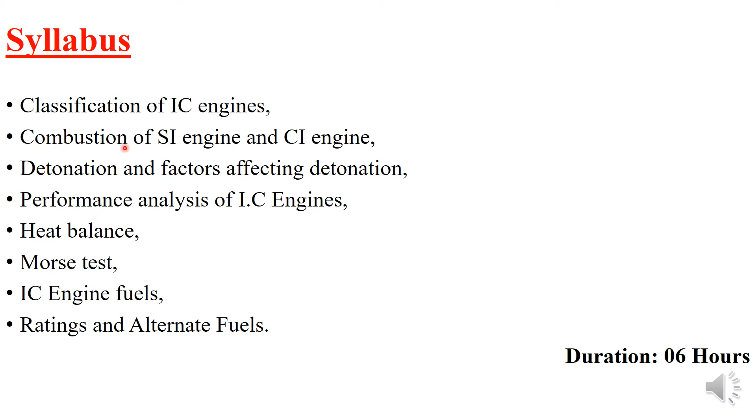So we will come to combustion of SI engine. Before going to combustion of SI engine, we should take care of what you mean by SI engine. As you already know how SI engine works, first the charge - that means fuel plus air - during the suction stroke goes inside the cylinder.

After the suction stroke, the charge - fuel plus air together - is compressed. So pressure will rise, temperature will rise. When the piston reaches top dead center, spark will be produced, and due to that spark, combustion of the fuel takes place and power is produced, which is transferred to the piston. So we have the expansion or power stroke, then the exhaust stroke.

Today we are concentrating only on the combustion part. Remember, only that combustion part - at the end of compression, whatever combustion takes place. So how is it going to happen?

In an SI engine, this is very important because due to combustion itself the power has to be produced. That means whatever energy the fuel is having, all of it has to be converted into heat energy. We are trying to improve that combustion efficiency, so you should know how that process takes place so that maximum power can be utilized.

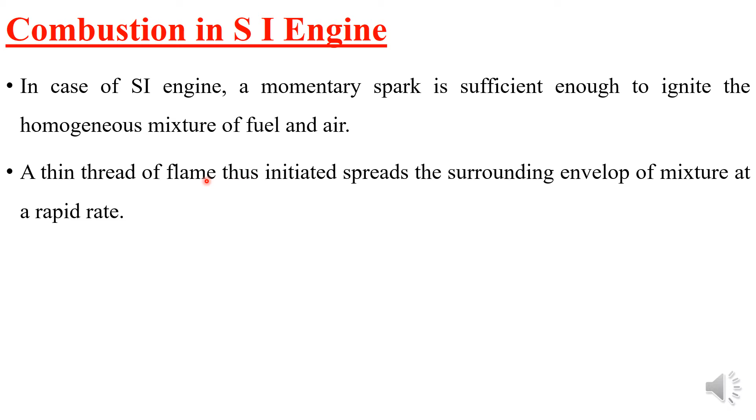As the momentary spark is ignited for the homogeneous cylinder mixture, a thin thread of flame will be produced - that means one flame nucleus will be produced. From that flame nucleus, we produce the flame front, and that flame front has to rapidly cover the entire combustion chamber so that all the fuel is burned and power is produced.

So now we come to know that combustion depends upon the propagation of the flame front. That means once the flame nucleus or flame thread is formed, the flame front is covered, and that flame front should rapidly propagate to the entire combustion chamber.

So what do you mean by flame front? Before going further, you should know what flame front means. Flame front is the boundary or the front surface - carefully listen - it is the boundary or flame front surface that separates burned gas from unburned gas.

So we have one closed chamber. In an IC engine, the combustion chamber is the closed chamber. Once the spark is ignited, flame nucleus is formed. From the flame nucleus, flame front is formed - that is the separation between burned gas and unburned gas, one boundary is formed, known as the flame front.

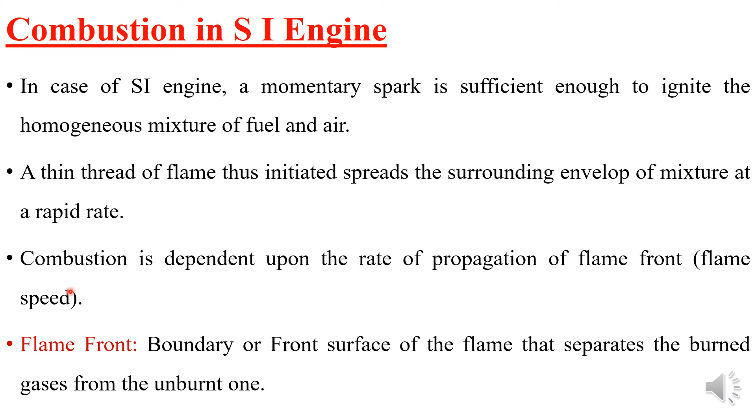So that flame front - how much speed, or how much it propagates to the entire combustion chamber, how fast it propagates - that is very important. So now you came to understand what I mean by flame front.

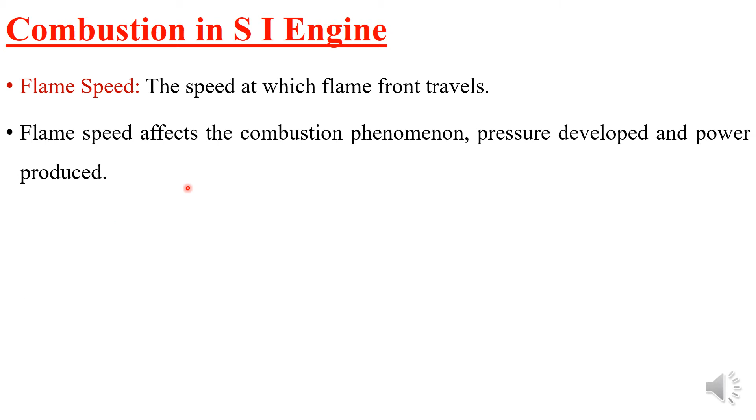We should know about flame speed. So what do you mean by flame speed? The speed at which this flame front travels through the entire combustion chamber - it has to travel the entire distance in the combustion chamber, how fast it travels, that is nothing but flame speed. This flame speed will affect combustion phenomena, power developed, and pressure developed inside the combustion chamber. So the burning rate of the fuel - whatever fuel will burn - depends upon flame speed and the shape of the combustion chamber.

Two important factors that this burning rate will depend upon: the flame speed, how fast the flame will travel, and the shape of the combustion chamber. So depending upon these two, burning rate will depend.

The factors affecting flame speed are turbulence, engine speed, compression ratio, initial temperature and pressure, and fuel-air ratio. Turbulence means how much turbulence we create between the fuel and air, so that it properly mixes and combustion takes place properly, and flame speed should travel faster. If more turbulence is there, flame speed will be more faster, it will travel.

Then the engine speed: if the speed is high, the turbulence will be high, hence flame speed will be high. Compression ratio: once again, if higher compression ratio means we create more turbulence, hence flame speed will be high for the higher compression ratio.

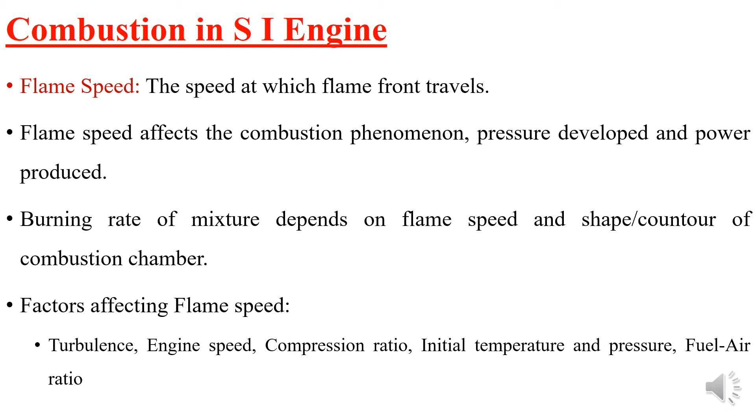So now you came to know about flame front and flame speed. Next, in the normal way, how combustion takes place after the compression: A to B represents compression, B to C is your combustion, C to D represents expansion.

A to B represents compression, B to C is the combustion, C to D is the expansion. That is the theoretical way.

But in the actual case, combustion won't take place at constant volume. It has to take some time before TDC and after TDC, so your pressure curve will be different. So we have certain stages of combustion. In 3 stages, combustion of an SI engine will take place.

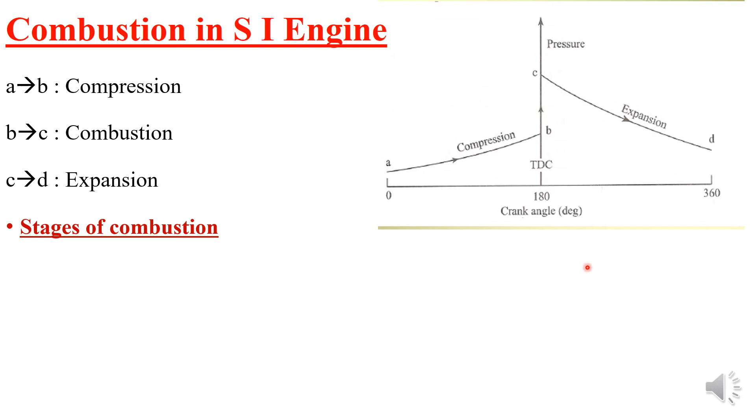The first stage is called ignition lag or initiation of flame. The second stage is called flame propagation. The third stage is the afterburning stage. Afterburning will be there for every case, because once combustion is over, unburned fuel will be remaining, which has to be burned in the expansion stroke itself. So afterburning occurs in the expansion stroke. But the 2 major stages in an SI engine are ignition lag or initiation of flame, and flame propagation.

Now we will go through these 2 stages, how it will be. Before that, let's see how the P-theta diagram will actually look, compared to the theoretical one.

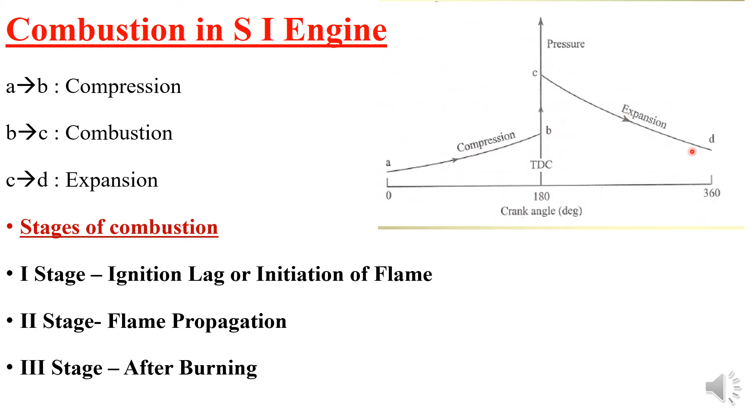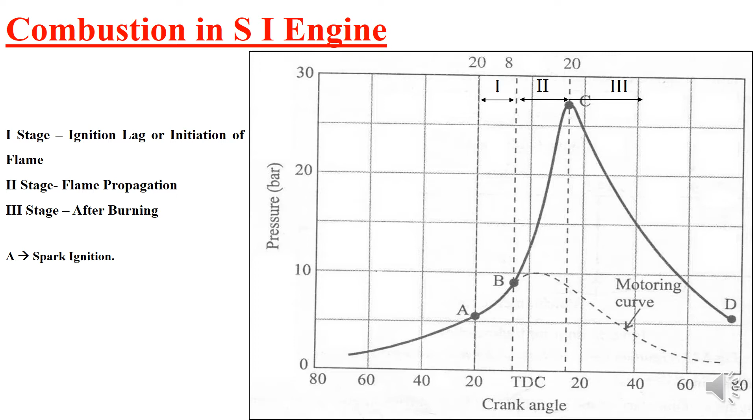Next, once you know about the normal way of combustion of SI engine, we should know the abnormal way - abnormal combustion, how it takes place. Abnormal combustion means spontaneous combustion of the fuel without initiation of spark, or without any means of initiation of combustion. So the fuel will ignite itself.

So that kind of combustion is known as abnormal combustion. This type of self-ignition of fuel without a flame, or without any means of initiation of flame, is known as auto-ignition or self-ignition. The temperature at which this self-ignition or auto-ignition takes place is known as self-ignition temperature - meaning without initiation of combustion, the fuel will burn on its own.

Every fuel has its own self-ignition temperature. When that fuel reaches that temperature, it will ignite by itself. It should have several conditions, because it should be within the ignition limit. Whenever the fuel is within the ignition limit and reaches that temperature, it will ignite by itself - that is known as auto-ignition or self-ignition, and that temperature is known as self-ignition temperature.

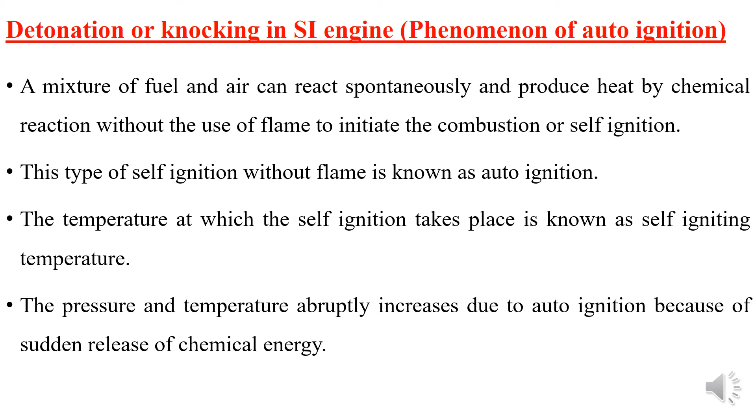Whenever that happens, pressure and temperature abruptly increase in an abnormal way, because there is a sudden release of heat energy or chemical energy of the fuel. Hence it is very important to know about abnormal combustion, because whenever it occurs inside the combustion chamber, it will affect components of the IC engine - especially piston, cylinder liner, compression rings, and cylinder head - reducing the life of the engine. So we have to avoid that. What are the conditions, and first we should know how it happens.

Before that, we will go through thermal efficiency - how much power is produced or how much heat is supplied, and from that how much work has been converted in the SI engine. This depends mainly upon compression ratio: a higher compression ratio means a more efficient engine. That's why a diesel engine, having a higher compression ratio, is more efficient, but a petrol engine has lower efficiency. Why do we keep the petrol engine at a lower compression ratio? Because of knocking or abnormal combustion in the SI engine.

Because of that reason, we are restricting the compression ratio up to a certain limit. We know that increasing the compression ratio will increase the thermal efficiency, but because of abnormal combustion, we are limiting that compression ratio to a particular value. Similarly for diesel engines also, we have a certain range of compression ratio, and for SI engines also.

So the maximum pressure of the cycle will increase, meaning pressure will increase with increase in the compression ratio. If you increase the compression ratio, the design concept changes, the weight of the engine will increase, and the cost of the engine will increase. So many problems will come into picture.

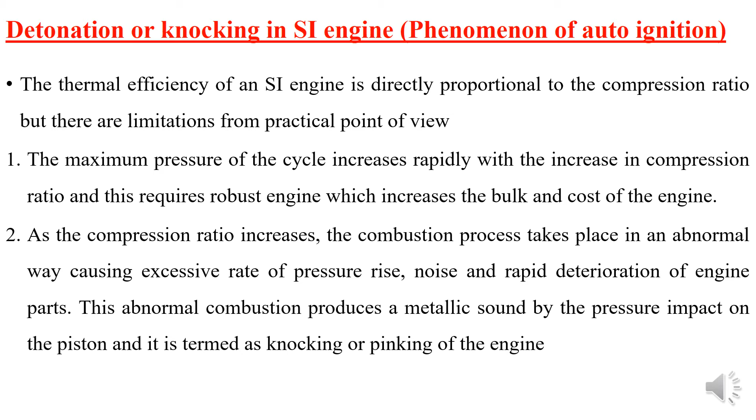So knocking, before going to our process, what do you mean by knocking? It means auto ignition of the fuel at the farthest end in the combustion chamber.

That means one spark plug is located in one position. Once the spark plug is located, flame will be produced near the spark plug because the spark is producing the ignition. So the flame front will be produced near the spark plug, and that flame front has to travel to the farthest end in the combustion chamber. So when it travels to the farthest end, the unburned gas over there may reach auto ignition due to compression ratio or some other reason, or due to earlier combustion products that might be there.

Due to several reasons, it may produce combustion in the farthest region, so auto ignition will take place there. This flame wave collides with the other flame wave due to high pressure, and it will affect the piston or any other component in the engine. So this rapid release of energy due to auto ignition produces high compression pressure waves.

These high pressure compression waves cause vibration in the engine or some kind of abrupt noise, and that is known as knocking or detonation. That means the motion of high pressure compression waves inside the cylinder causes vibration of the engine parts and a pinking noise, and it is known as knocking or detonation.

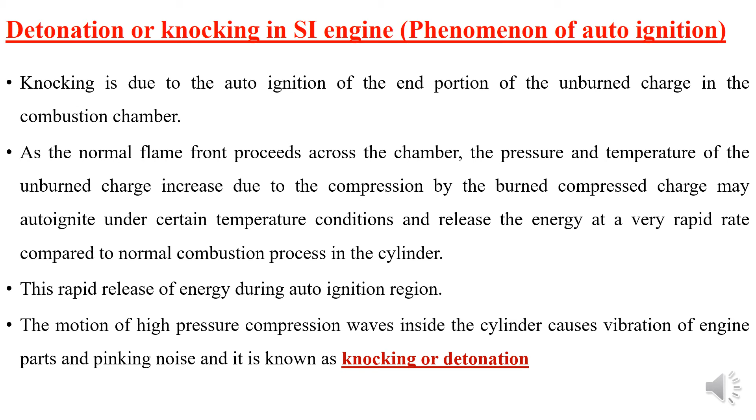Now let's see the diagram for normal combustion. Say A is the spark plug, and B to C is the flame front, showing normal burning of the charge, which is the fuel and air mixture. D is the farthest point, or the maximum distance from the spark plug.

So in the normal way, once the spark plug initiates the flame front, this flame front travels towards the farthest end. So this B to C will start from here, propagate, and reach D. This is how normal combustion takes place without detonation, and we get a smooth pressure curve, meaning we won't get any kind of auto ignition here.

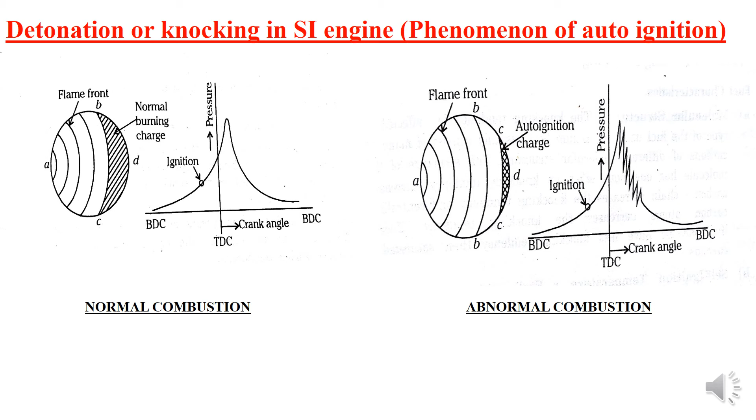Of two waves, forming the abrupt change in pressure rise. So we won't get smooth curves, we'll get curves like this over here. So this is known as detonation or knocking in SI engine. This is how detonation takes place in SI engine.

So what are the effects? As already I told, it will cause heavy vibration and creates undesirable noise. Auto ignition may, what will happen? It may overheat the spark plugs. Once the spark plug is overheated, it will be in the hot temperature region.

So in the next cycle, during the compression stroke itself, pre-ignition of the charge will take place, hence power will be lost. So during the compression stroke itself, combustion of the fuel will take place, hence power will be lost.

And more heat means we have to take that heat away by the cooling water. Effectiveness of the cooling water will be more, heat dissipation rate should be rapid. The engine parts are subjected to high pressure waves, which will cause damage to the component parts.

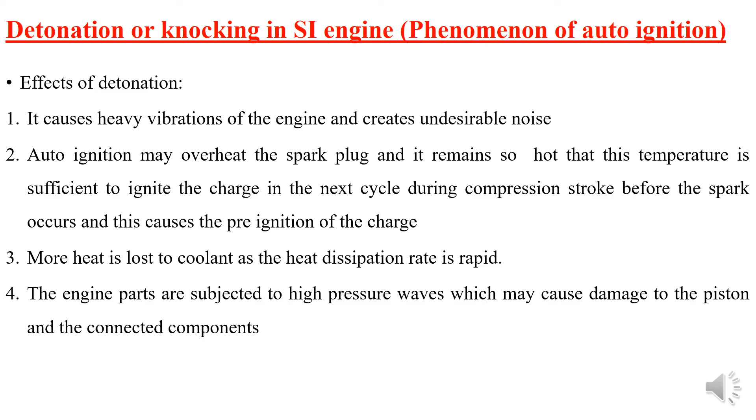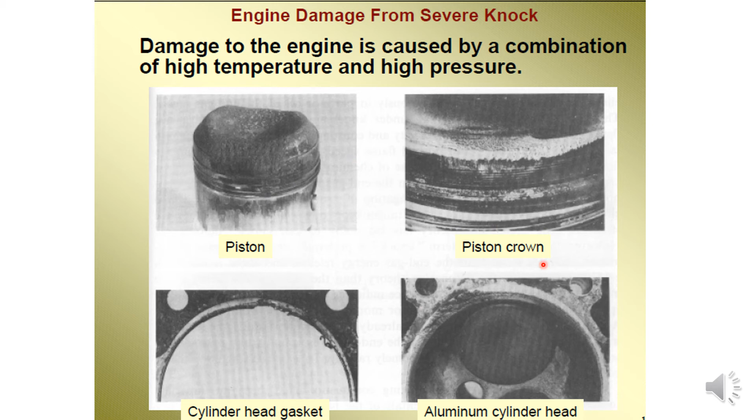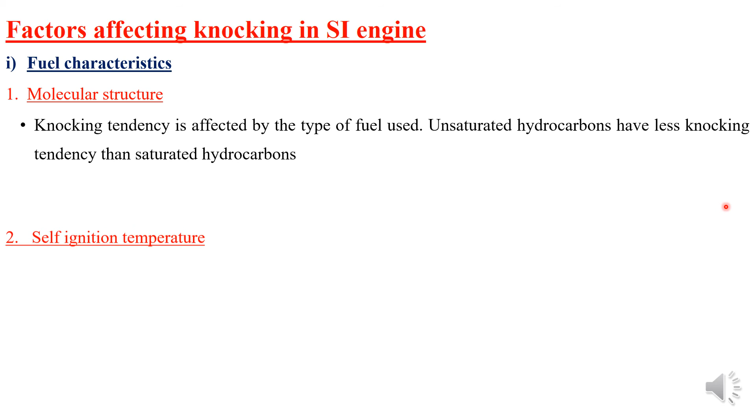Next, factors affecting the SI engine. Several factors are there, I will go through very quickly about this one. So the first one is the fuel characteristics. In these fuel characteristics, we have molecular structure, self-ignition temperature, and flame velocity.

Molecular structure means unsaturated hydrocarbons will have greater resistance to knocking than saturated hydrocarbons. Self-ignition temperature, as already I explained, the fuel should have a high self-ignition temperature to avoid knocking. If it has a lower self-ignition temperature, it will ignite before the end of compression itself. So the fuel should have a high self-ignition temperature when selecting the fuel.

Flame velocity should be more, meaning it has to be very fast, it has to travel through the entire combustion region, the entire combustion chamber, very fast. So flame speed or flame velocity should be more for that particular fuel, and this flame velocity is once again dependent on several factors which I explained in the second slide. So you go through that one once again.

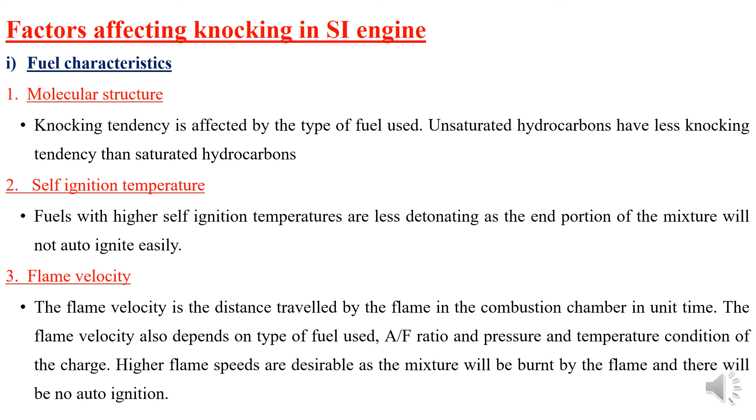Next we have the condition of the charge. One is the air fuel ratio. As already told, whenever flame velocity is near to stoichiometry or slightly richer side, we will have higher flame velocity, and better anti-knocking quality will be obtained whenever the air fuel ratio is on the richer side compared to the leaner side.

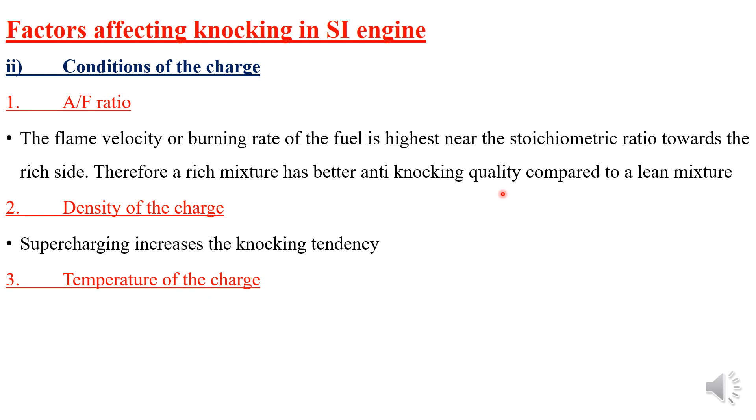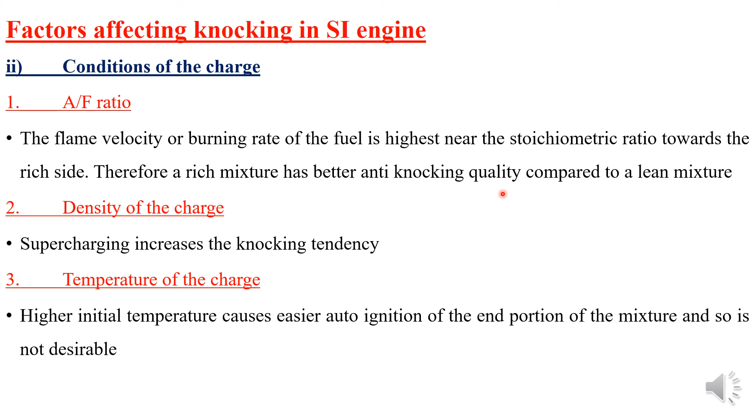Density of charge: if you are applying a supercharger or turbocharger, density will increase, which means knocking tendency may increase. And temperature of the charge: a higher initial temperature means it is easier to reach the self-ignition temperature very fast, hence knocking will be very high whenever the temperature of the charge is higher.

Next, compression ratio. As already told, higher the compression ratio, the higher the knocking tendency. Hence, compression ratio should be as low as possible so as to avoid knocking.

Under compression ratio, two types are there: dilution of residual gases and valve timing. Dilution of residual gases reduces the knocking tendency, and this way we can reduce the knocking. So valve timing is a very important aspect.

Spark timing means a particular timing where the spark is produced before TDC. For a particular engine, it is designed for a particular timing, say 12 degrees before TDC. So at 12 degrees before TDC itself, your spark will be ignited. If you want to increase from 12 to 14, that is called advancing the timing.

Or if you want to decrease, that means from 12 to 10, then it is called retardation of the spark timing. You are delaying the spark timing from 12 to 10, or 12 to 14 means you are advancing the timing, because you are in the compression stroke. Remember, just try to understand that concept, advancing and retarding.

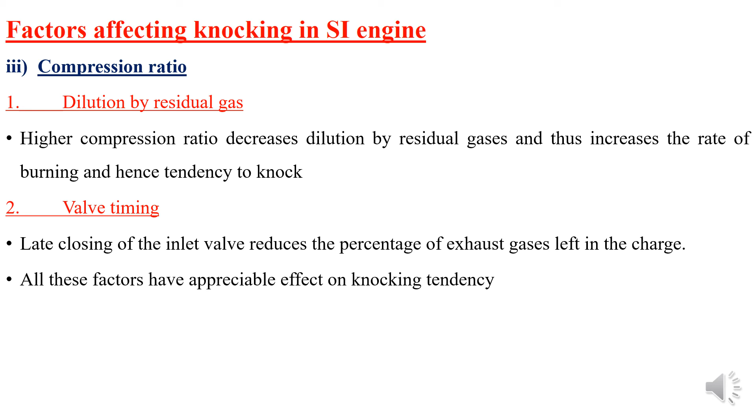If you advance the timing from the normal or prescribed timing, you will be giving more time for combustion, and the rate of knocking will be high during that case. Retardation of the spark timing will give lesser tendency for knocking, but you can't retard too much because power loss will be very high. So we have to get the optimum timing for the knocking tendency.

Next, ignition: location of the spark plug, which is very important. We have to locate the spark plug in such a way that the flame has to travel the entire region of the combustion chamber. It should not be very late to reach the furthest end. If it is very late to reach the furthest end, the knocking tendency will be very high.

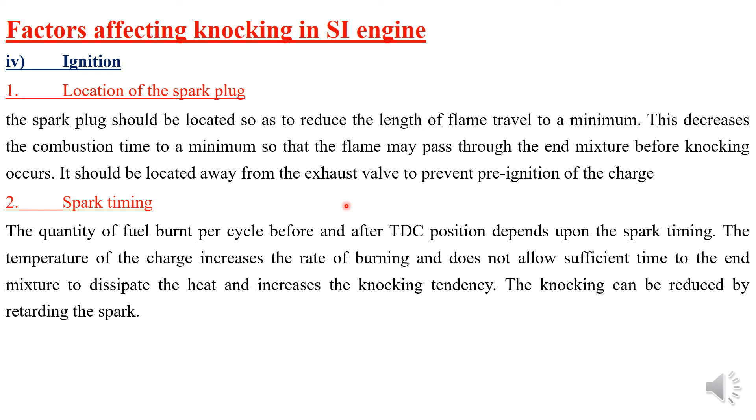Also, we have to make sure the spark plug is located away from the exhaust valve, because the exhaust valve always operates in a high temperature region. If it is located near the exhaust valve, pre-ignition of the charge will take place, and the tendency of knocking will be very high. So the spark plug should be located away from the exhaust valve, and it has to reach the farthest end, meaning it has to travel more distance within a quick time.

Spark timing was already discussed in the previous case. Engine speed: increasing the engine speed increases the turbulence and the knocking tendency will be reduced. So increasing the engine speed will reduce knocking.

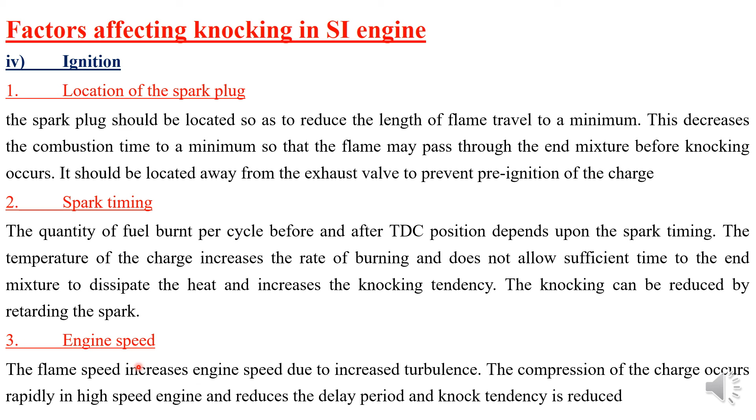Engine load: while increasing the load, what will happen? Cylinder wall temperature will increase, so knocking tendency can increase. So we have to maintain a particular lesser load from the maximum load, so that we can avoid the knocking tendency.

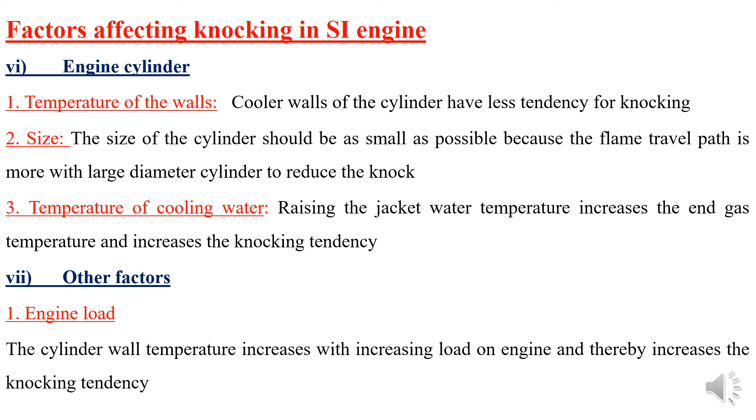Next, rating of the fuel, a very important aspect. Rating of the fuel means how much that fuel will resist knocking tendency. That number indicates how much it will resist knocking or detonation tendency. If the number is higher, it has greater resistance to knocking, greater resistance to the tendency to knock. So we have two such reference fuels.

One is isooctane and the other is n-heptane. Comparing our selected fuel with respect to these two fuels, we get a number that is called the octane number. Of these two fuels, isooctane offers greater resistance for knocking or detonation.

Therefore, it is assigned a rating of 100 octane number. Isooctane is rated as 100 octane number. Similarly, N-heptane, which will detonate as soon as it is inserted into the engine, is rated as 0 octane number. That is, it doesn't have resistance for knocking, so knocking will be very high in N-heptane, and that is why it is assigned a 0.

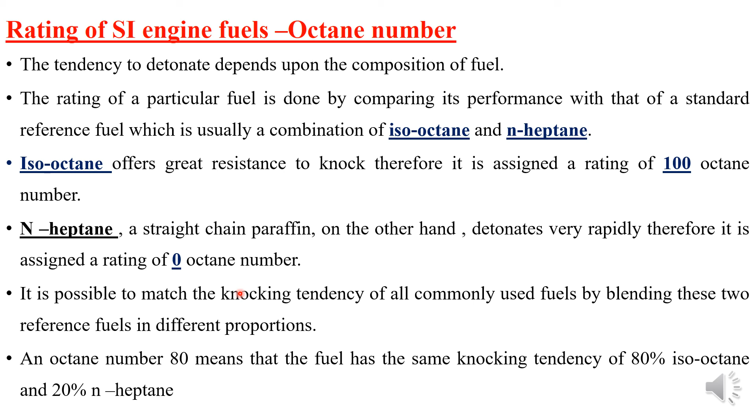So whatever fuel we select, we can rate it with respect to these two references. It is possible to match the knocking tendency of fuels by blending these two fuels in different proportions. For example, if your selected fuel has an octane number of 80, that means it has the same knocking tendency as 80% isooctane and 20% N-heptane. So whatever combination gives the same knocking tendency, that is the meaning of that number.

So in this way we rate SI engine fuels. For example, if you have an octane number of 50, that means the fuel has the same knocking tendency as when 50% isooctane and 50% N-heptane mixture is formed. This is how we rate SI engine fuel in terms of octane number. So SI engine fuels are always rated in terms of octane number.

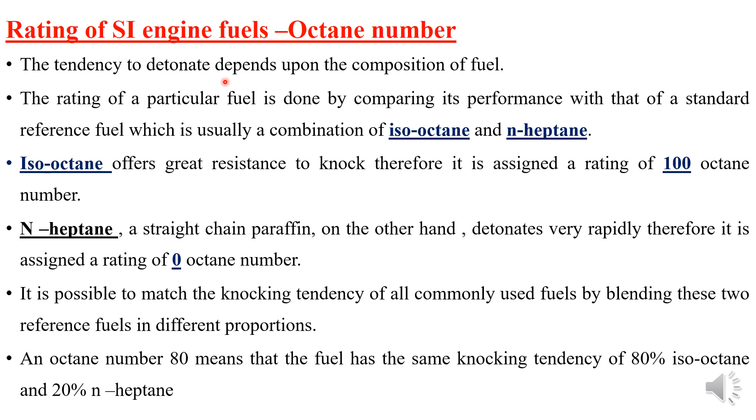Whenever there is greater resistance, you can increase the compression ratio without knocking. If you increase the compression ratio, you get higher efficiency. So octane number is important for the fuel. If you have a higher octane number, you can use that fuel for a higher compression ratio. Power output and specific consumption rate are functions of compression ratio, so those can be considered as functions of octane number. Higher octane number increases efficiency because it allows use of a higher compression ratio, hence efficiency of the fuel can be increased.

For a given engine there is a critical compression ratio beyond which knock occurs. As already told in the previous slide, for SI engines we generally select a compression ratio of 6 to 10, and for diesel it might be 10 to 14, up to 20 or 21. So that range only you have to use. Beyond that range, knocking will be very high, damaging the piston or other components of the engine. A particular range exists for a particular fuel: for diesel it is 14 to 21, and for petrol it is 6 to 10.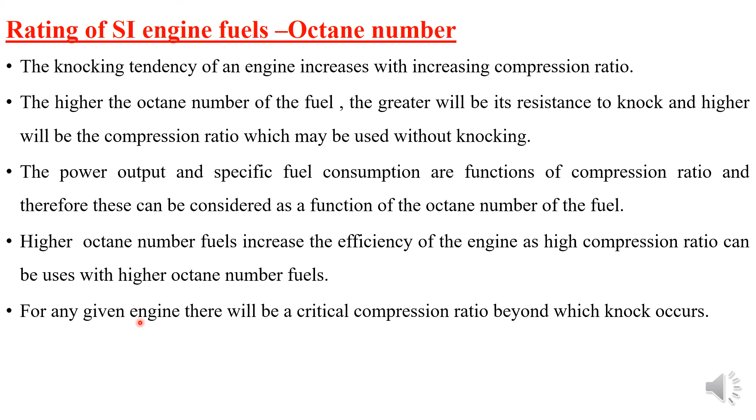If you want to increase the compression ratio beyond this range, the octane number has to help. You should have a higher octane number to use that fuel for a higher compression ratio in any given engine. So there is a certain critical compression ratio beyond which knocking will be more, or knocking will occur in that engine. That compression ratio is known as HUCR, or highest useful compression ratio. For a particular given engine, up to that critical compression ratio knocking may not occur; beyond that compression ratio, knocking may increase. This critical compression ratio is known as the highest useful compression ratio, HUCR.

This is how we rate SI engine fuel. This completes the concept of the SI engine. We have explained it very briefly, as per the syllabus.

Many more things are there which you can refer to if you are interested, especially if your field is engines. You have to refer to either the Richard Stone book, Internal Combustion Engines by SAE Publishers, or another book we call the God of ICE Engines, by John B. Heywood textbook. It is a very informative book on ICE engines, so you can refer to that book also.